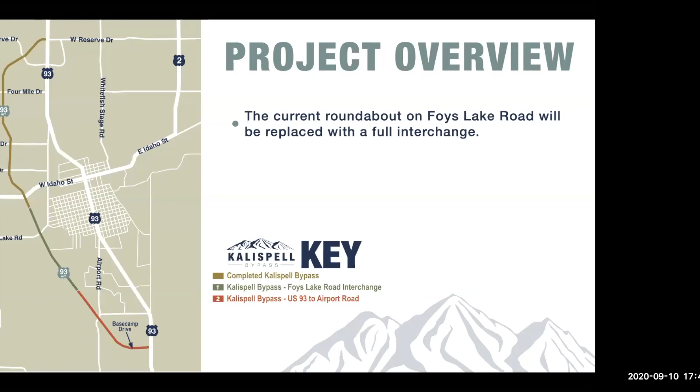The ramps from this interchange are going to be coming down on either side and accessing roundabouts. There will be a roundabout on either side of the interchange to facilitate traffic moving into both the Foys Lake area and Kalispell. This is by far the safest intersection option available, and we always prioritize traveler safety. My colleagues will also dive into this discussion a little later in the presentation.

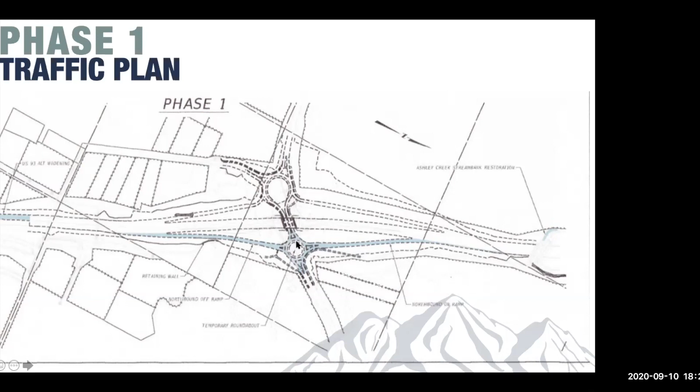And so once that is built, we will route traffic down through there, and that roundabout will temporarily act as the roundabout does now. There's some slight modifications we have to make for it to do that. We've designed that so there's very little throwaway once we convert it to the new configuration.

So once those soils are settled out and the bridge is constructed, then as you can see, we'll put traffic on the main line, we'll construct the west side, the 5-legged roundabout, and proceed towards finishing the entire project. So I hope that kind of makes it a little clearer. The time frame that we're going to be on that temporary surface that will be paved is probably 2.5 to 3 months to allow us to get that settlement out of the embankment areas and get the bridge built. So I hope that answers it.

Thank you. All right, our next question is from Susie again, and her question is, how far south will the widening happen in this phase? She lives on the far west side of the South Side Estates and was wondering if the sound wall will be extended as the widening happens. The little fence erected by the builder doesn't block the sound as well as the concrete wall. So I'm gonna go over to Kathy first for that.

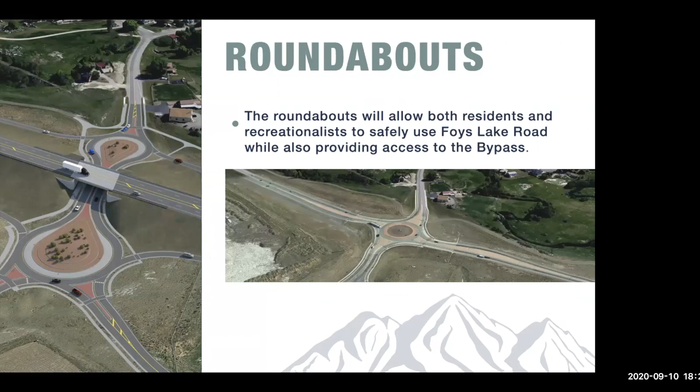There are no plans right now to install a concrete barrier on that 9-foot paved median that's in the center of the bypass. That was in the original plans, and I defer to MDT on this, but there are no plans that I'm aware of to install a concrete barrier between the two opposing directions. And Bob or John, do you have anything further, or at this time there's just no plans?

Sorry about that, I was struggling with my mute button as well. And you're correct, Kathy. At this time, this is a tangent stretch of roadway, and there's no plan to install a median barrier through this stretch.

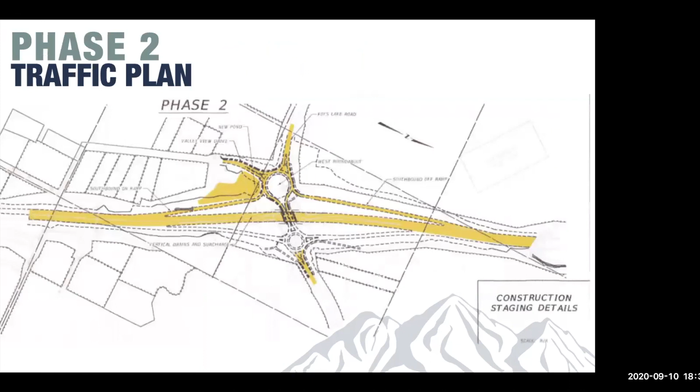All right, we did have a question come through. It is basically, if you guys could go back to the schedule, one of our attendees was wondering if we could go over the construction schedule again.

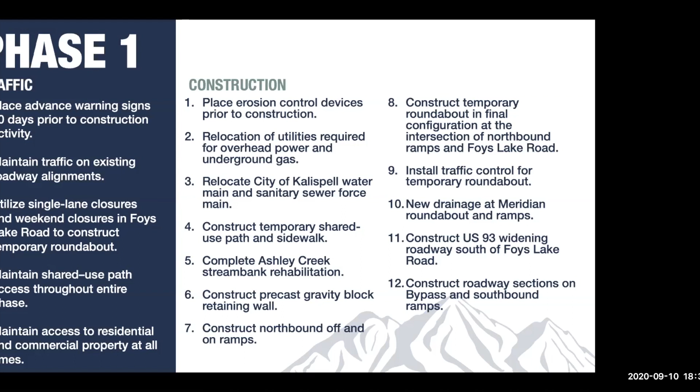You bet, Takami. So in general, our major construction will begin in March of 2021, depending on how our spring goes, and then major construction all summer in 2021, and open fully to traffic in November of 2021 is the plan. There is some work that'll have to be done in 2022, but in general that's our final cleanup stuff, the remaining chip seal and striping and whatever is remaining for seeding.

Great, thanks, John.